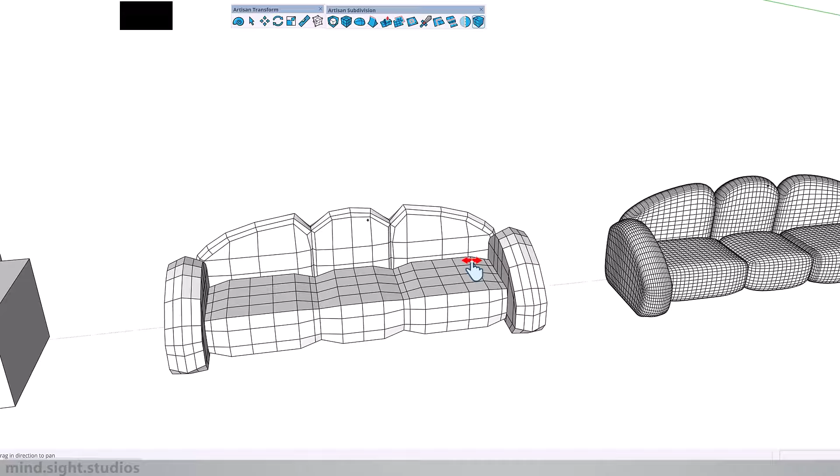So soft furniture is one of the hardest things to model in SketchUp. So in today's video, we're breaking down the Lithos Sofa using Artisan, and we're going from a low poly base to this smooth, realistic form in a step-by-step workflow with Artisan. Let's dive in.

So anytime you model something in SketchUp, you need to simplify the shapes first. For this example, we're going to model this sofa. And if you take a look at the reference images, you can tell that some of the shapes are similar while others are unique. So here's how we're going to break this down.

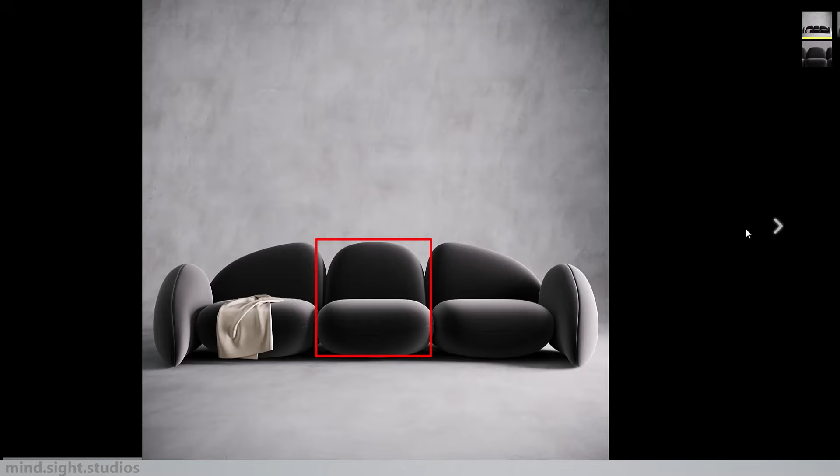First, we have this backrest and seating part, which is unique. Next, we have these two seating sections, which are pretty similar. And finally, we have the armrests. And because the sofa is symmetrical, all we have to do is model half and then mirror to the other side.

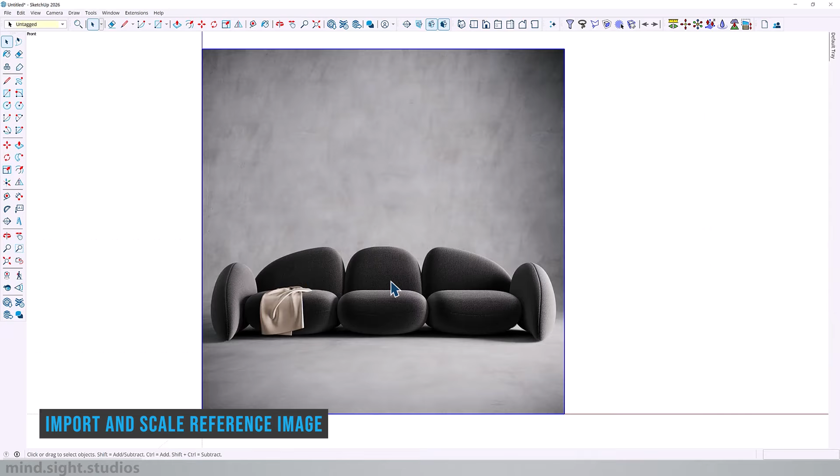So first, let's start by dragging our reference image into SketchUp. We're going to press X, that's a custom shortcut to explode. And then we're going to make a group.

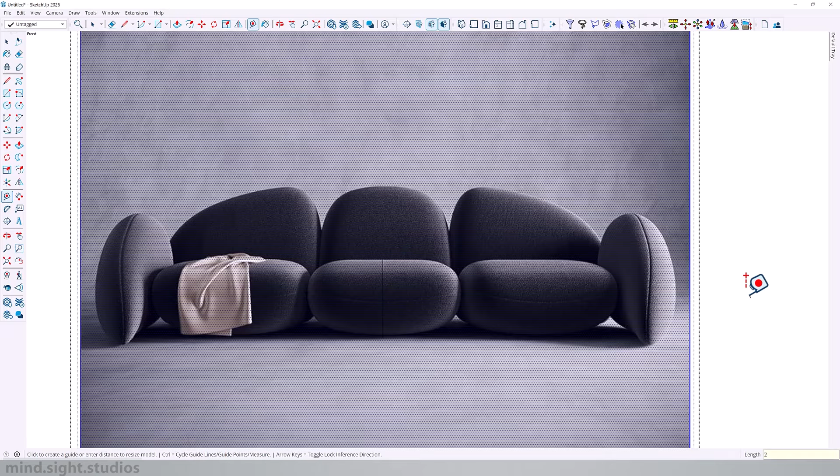All right, so first thing, we need to scale this image. I'm going to draw the 24-inch reference line for the height of the seating. And we're going to use the tape measure tool to scale it to that size. Type 2 feet, which is 24 inches, and accept the request to scale. And now we have a realistic proportion of our image.

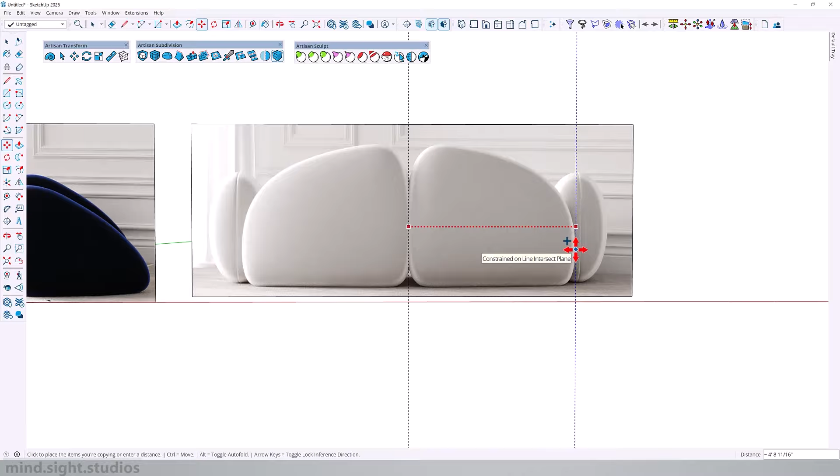This is also not a fixed scale, as we can always adjust things later in the video. And I found as many images as I could, scaled them to the same size, and now we can start to trace on top. Now before we start blocking the shapes, let's add some guidelines using the tape measure tool. So I'm going to use these guidelines just to get a rough measurement of some of these shapes.

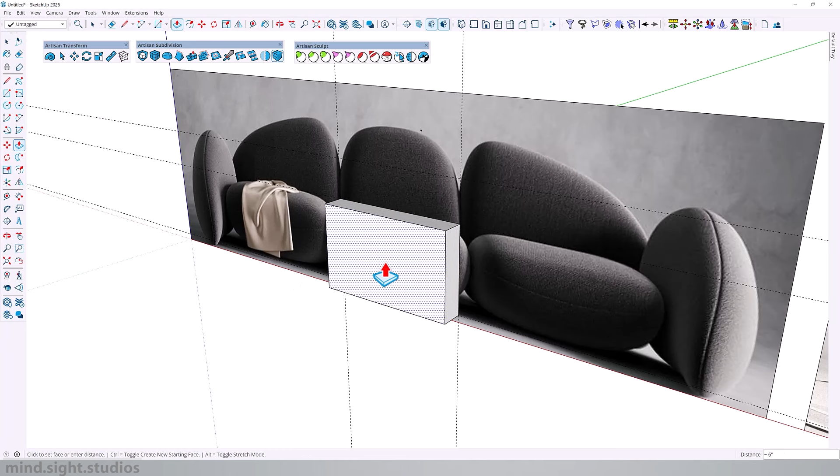Right, so first let's block out these shapes using the rectangle tool. And I'll do my best to come as close to the shapes as possible. And also use the push-pull tool to extrude into a rectangle. And as always, make sure to group your shapes into groups or components. So this is going to be a group.

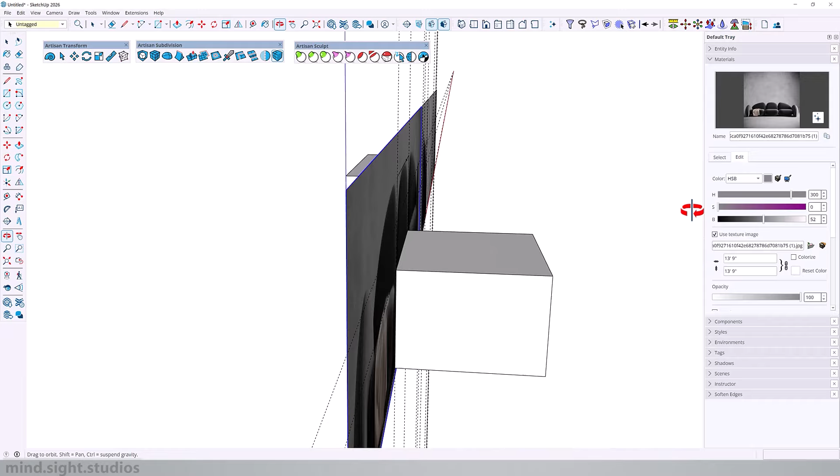And I'm going to repeat the same workflow to build out the backrest shape with the rectangle tool. Use the push-pull tool to extrude and convert it into a group. So we got two shapes, and in order to see through this material, I'm just going to select, go to my material editor and decrease the opacity.

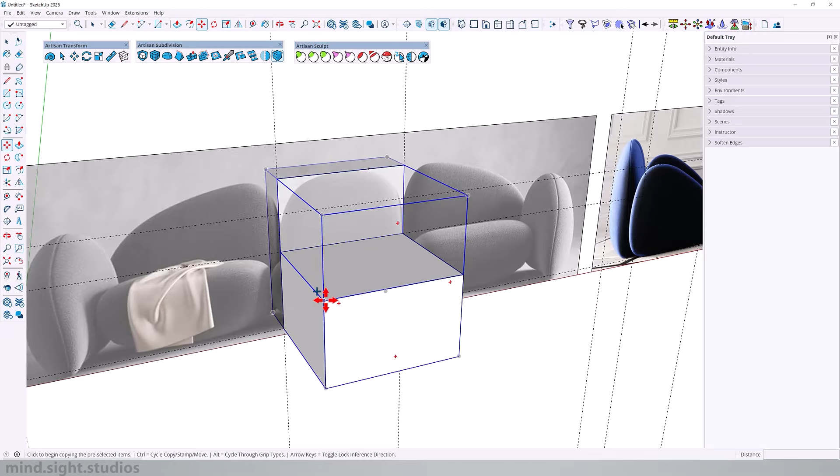So now that we have this mid portion, let's select the two shapes, right click and turn it into a component. And now that we have this, we can easily create the other two. So select move, hit Ctrl to make a copy, mirror to the other side. This is around a foot longer, so I'm going to right click, make unique.

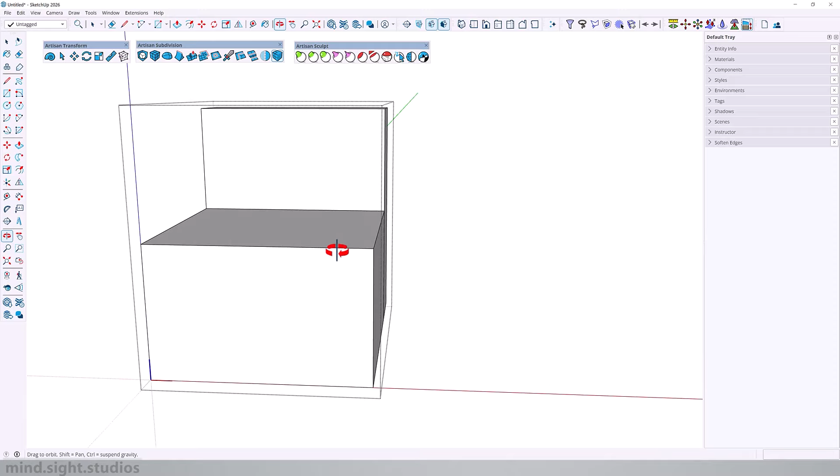And I'll go inside this group, and I'm actually going to use a SketchPlus feature called Deep Stretch. This allows you to stretch entities inside a nested group. Select these two outer edges and let's extend this another foot. So we have something like that.

And for the armrests, we're going to repeat the same steps. We'll create a rectangle. Next, push pull by 4 feet 6 inches. To me, this feels a little overscaled, but we're going to scale this down further at the end of the video.

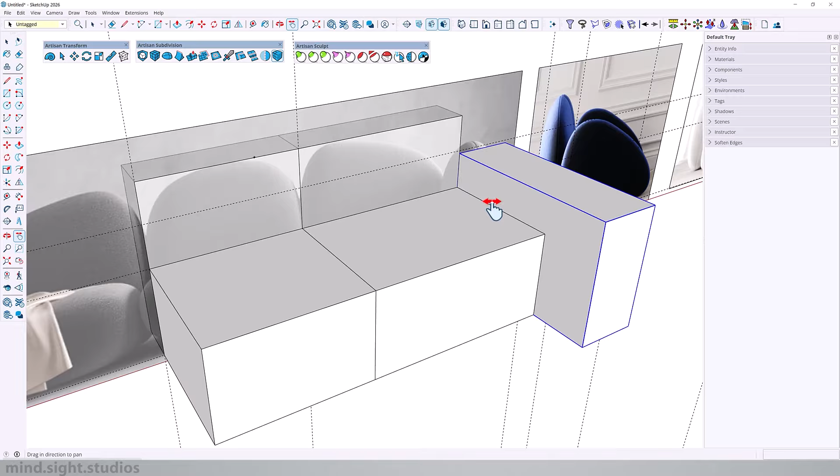So now that we have this half, I'm going to copy this in place in this component, and we're going to mirror this to the other side. So select that component, activate the mirror tool, hit Ctrl to make a copy, and drag the red axis to the center of your sofa so it creates another copy.

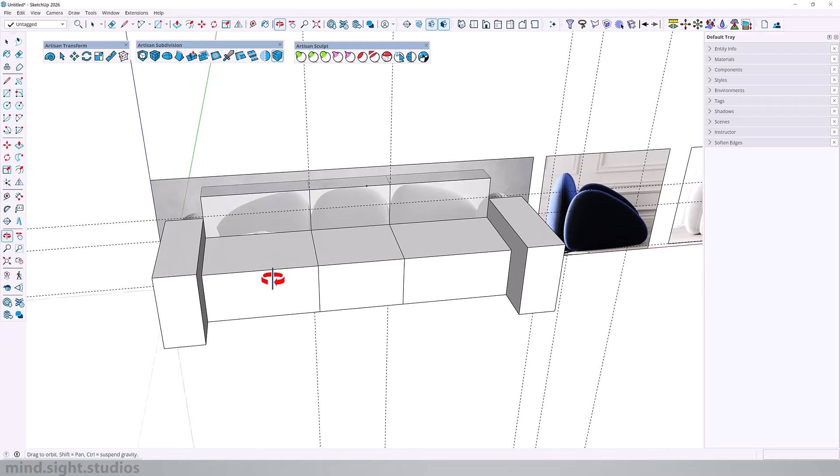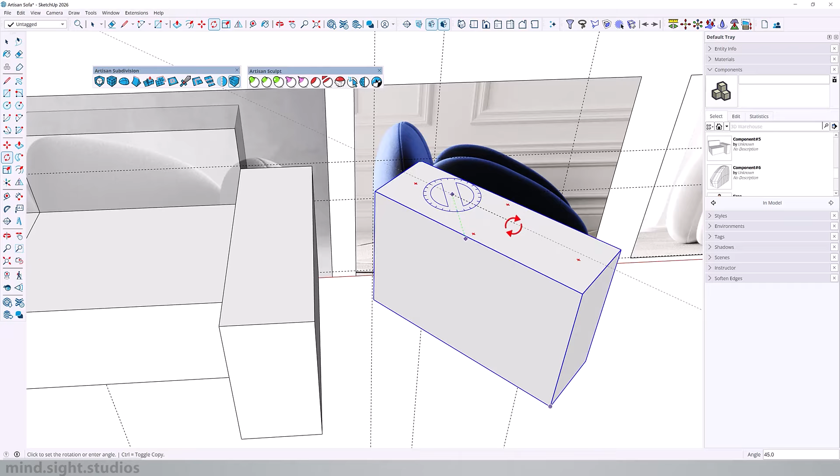And for our first step, we have our sofa completely blocked out. So for the next step, we're going to try and get these blocks as close to the shape in the reference images, and we're going to use a couple of tools in the Artisan extension. So we're actually going to come in here, simply going to copy this out of the group and line it up with the reference image. So turn it 45 degrees.

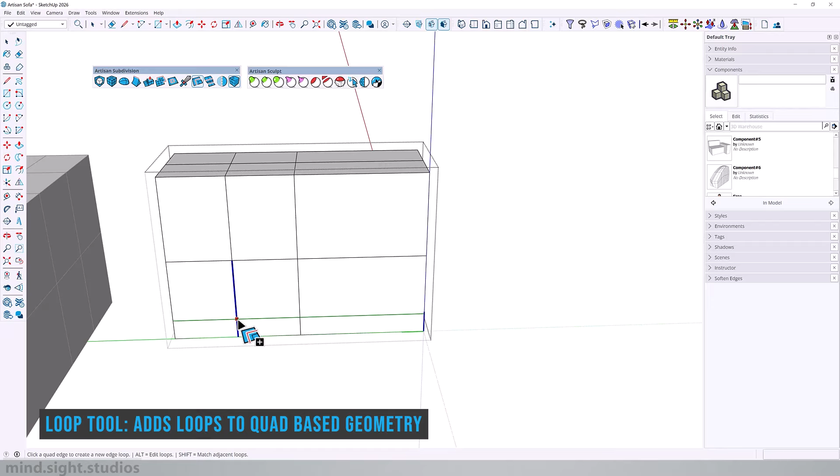Now from here, we'll go inside the component, as you can see, and we're going to subdivide once. And we get this quad subdivision across this block. So that adds subdivision automatically. And now I'm going to use the loop tool to add some manually myself. So I'm going to add one here, one at the bottom, and one to the right. And depending on the direction, this tool adds a loop cut across the entire object.

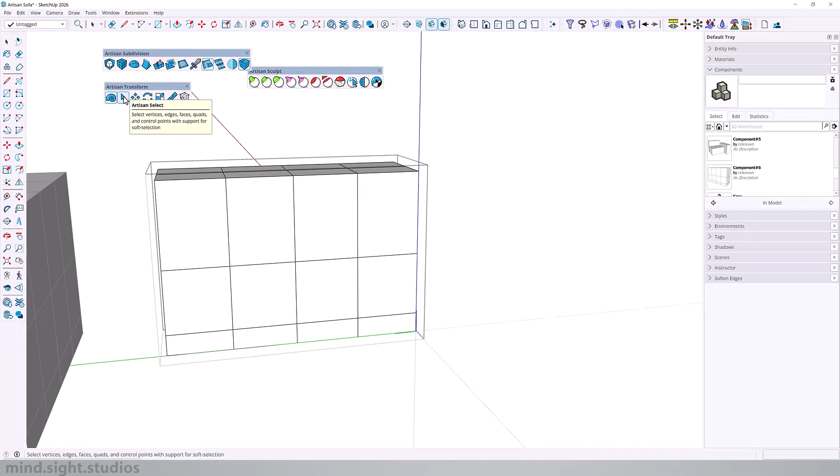And from here, I'm going to activate Artisan Mode. This is going to switch to Artisan's version of the SketchUp tools, which will be these guys right here. I can now use the select tool to select some of these vertices and edges. So now we can start to move this and try to come as close as we can to the actual shape of our image.

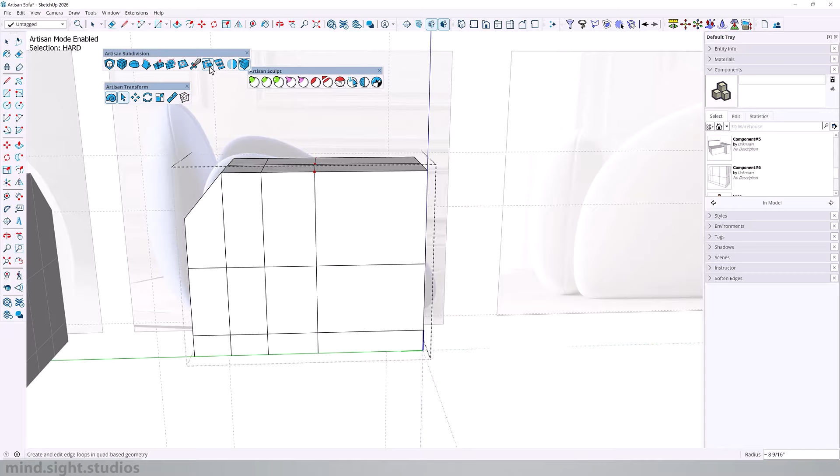So my workflow here is pretty simple. I'm selecting the vertices and edges and repositioning them to match the profile of the reference image. And while doing this, I'm adding as many loop cuts as possible to subdivide my shape even further to make it easy to create the rough shape.

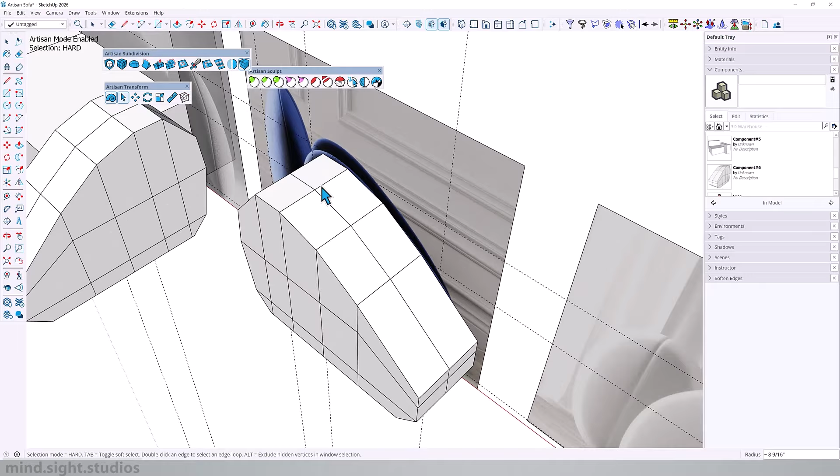Let's suppose we end up with something like this, which is not perfect by the way. But to show you what this could lead to, I'm going to activate Subdivide and Smooth and increase the iteration to 2. And as you can see, this gives us that smooth shape that we can see in our reference image. So it seems like everything is going in the right direction. So let's add a little bit more detail to the subdivision.

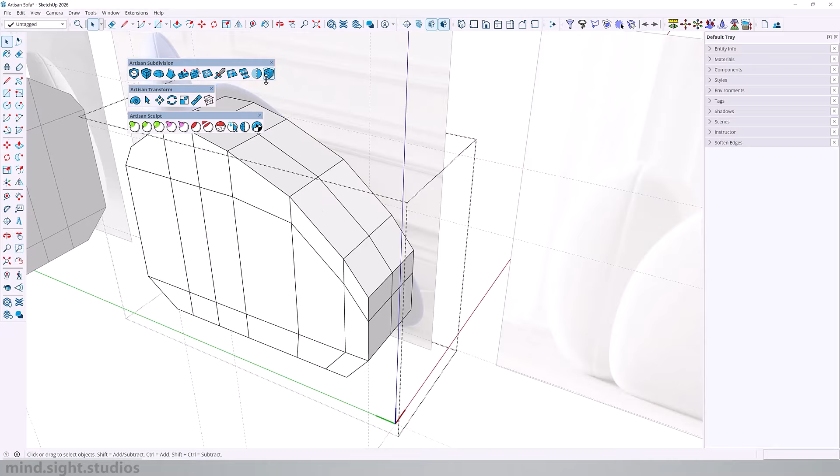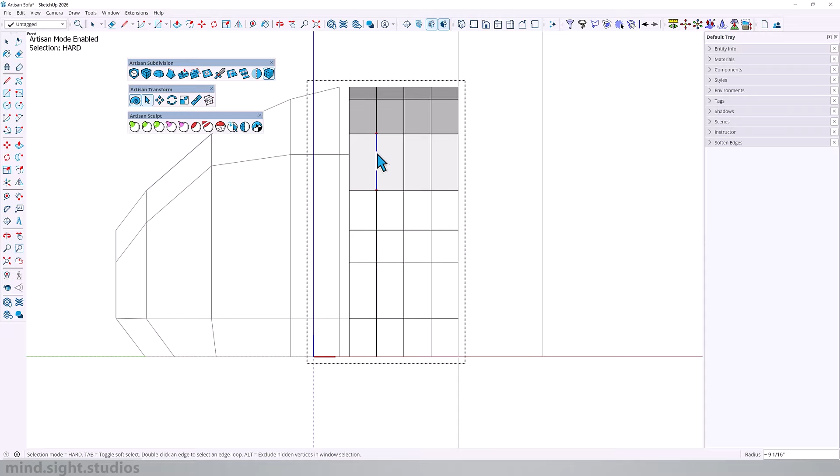Let's go inside the group and we'll activate the loop tool. We're going to add 2 more extra loops, one on either side. Align view and parallel projection. Next, we're going to activate Artisan Select, and I'm going to double click to select my loops. So one click selects one edge and double click selects an entire edge loop. And I'm going to hold Shift, do the same to the next 2 loops.

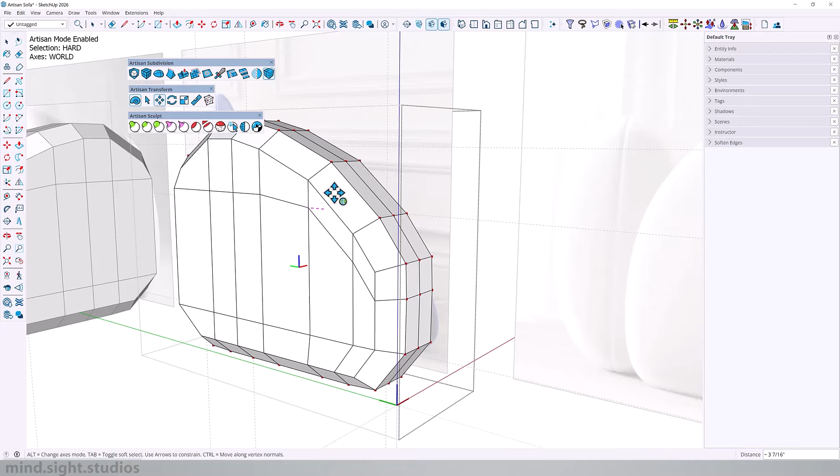Remember, we are in Artisan mode. I'm going to select the Move tool with my shortcut, click once to make my move, and right here I'm going to hold Control, and this is going to allow us to move the selection along the vertex normals. And we'll repeat the same for the loop cut in the middle. So double click to select, activate Move, click and hold Control to move along the vertex normal.

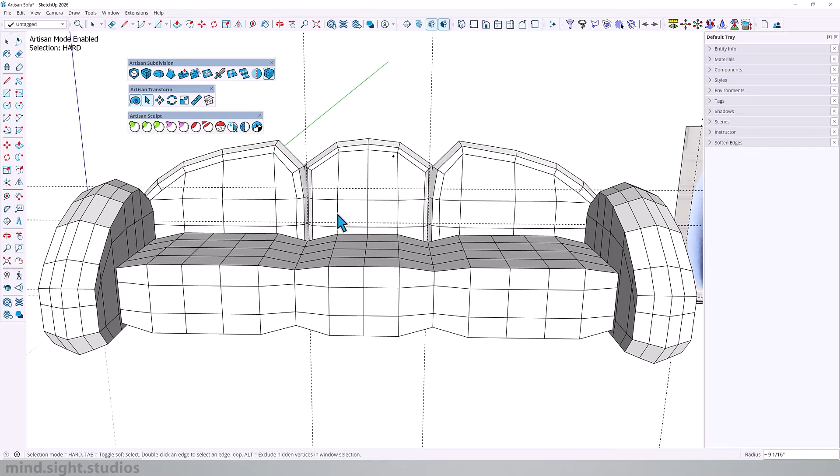Now before we continue, let's apply the same workflow to these rough shapes. We can go from this to this, and if we hide the reference image, you can see how it's more or less pretty close to the shape. But here's where we can start to add some detail. If we look at the very bottom, you can see that some of this needs to be completely flush so it feels like it's resting on the floor. That's the case with the armrest and some of the backrest as well.

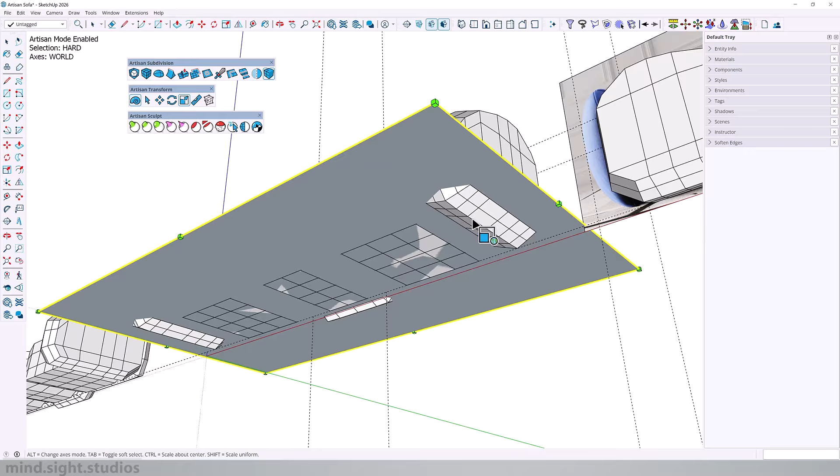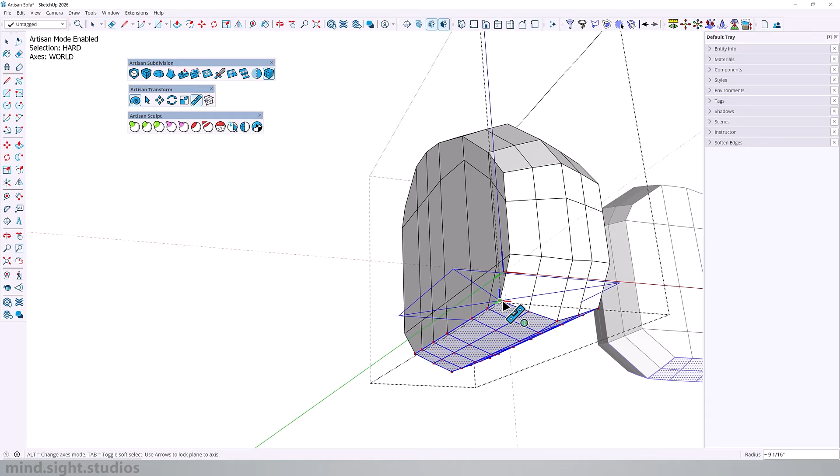So what I'm going to do is draw a plane, and we'll try to flush everything that's past this plane to that level. So in order to do this, we're going to use Make Planar. If I come here, I can make my selection of the vertices and edges that I wish to make flat. Activate Make Planar, reference one of the vertices and use the up and down keys to switch the axis. So this is going to be on the blue axis. Make one click and that flushes everything to that plane.

And if you start to see mistakes like this, I can select that vertex alone and just move it up. So that solves one. And then we got back here as well.

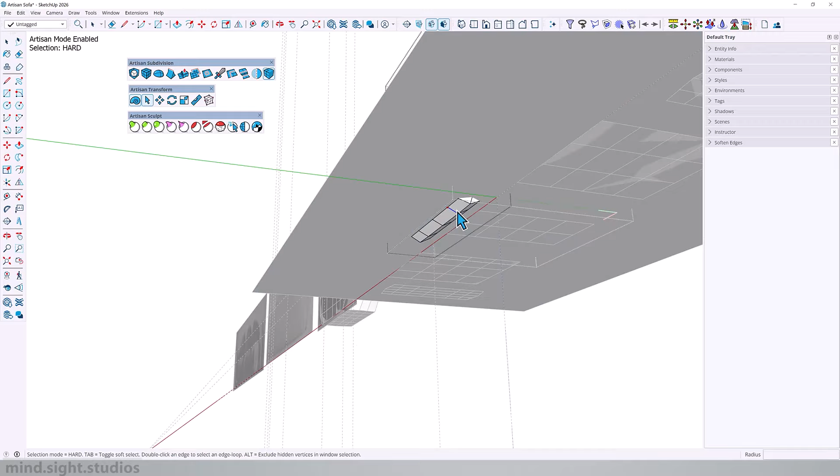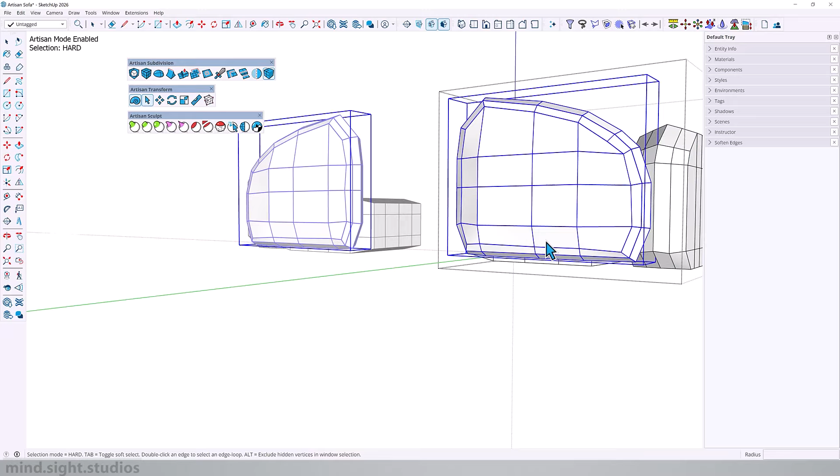So let's repeat. Make selection, activate Make Planar, reference the vertex, lock on the blue axis using the arrow keys, and click to flatten it out, and you should have something like this. Now what I don't see is actually these guys touching the floor, so we'll go into that group, make that selection, and we'll bring it up to that point.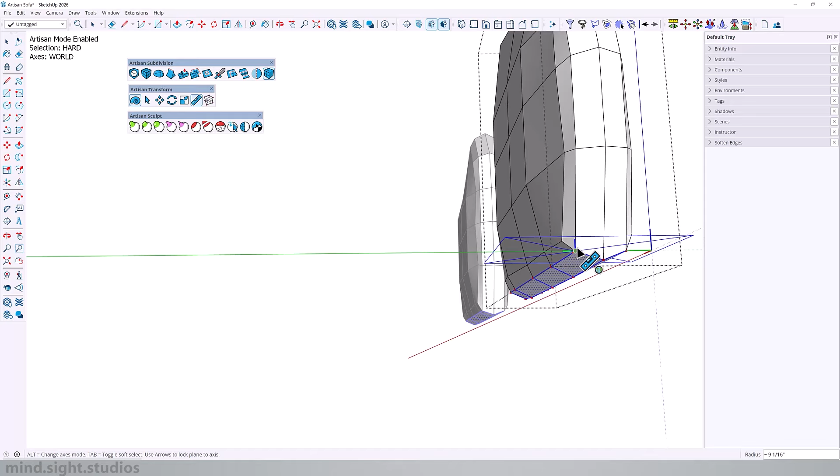So reference that point, bring it down on the blue axis and lock it down to the face, and then we'll repeat the same step. Select, Make Planar, vertex point, and click. So now that looks much better. As you can see, everything is touching the floor. Now this is actually a very important step, and we're going to repeat this on certain areas of the backrest so everything feels flushed.

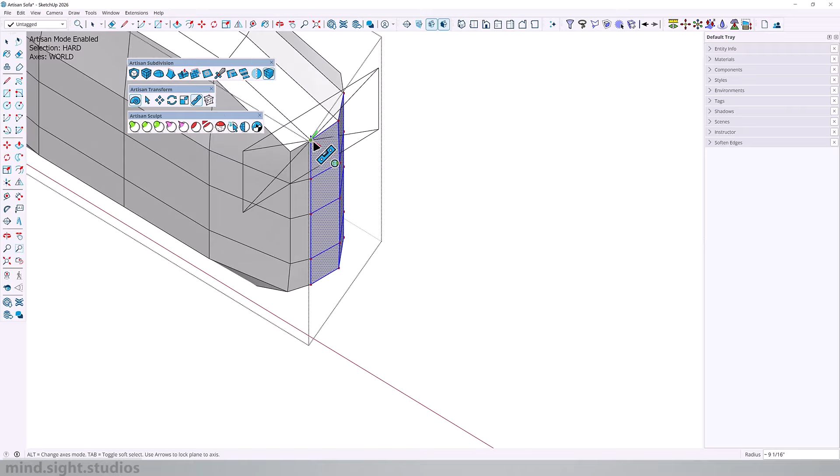So we're going to use Make Planar to make these side edges flat. And just to add a little bit more detail, we're going to move these edges a little bit further so it has a bit more of a round profile. And also, just to be safe, we'll add another loop cut on the left and right sides of the cushions, and you should end up with something like this.

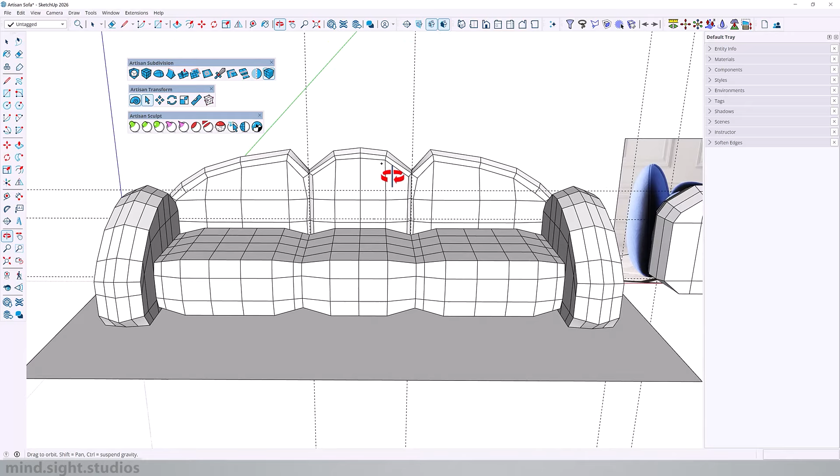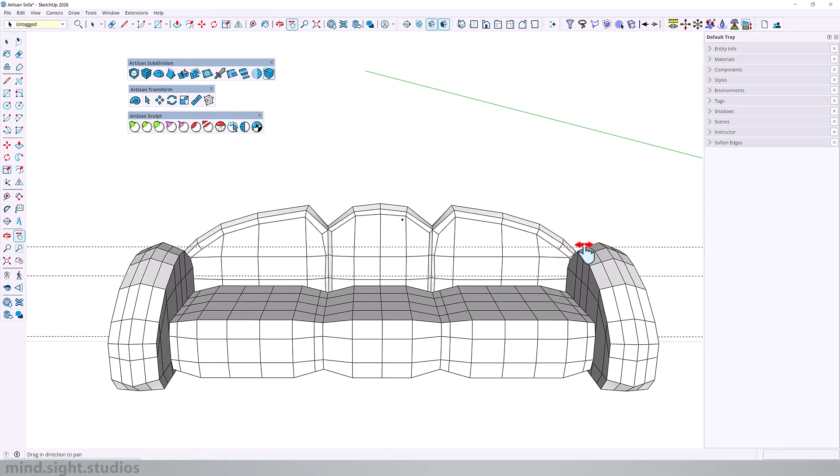Okay, so let me repeat the steps very quick. So far, we had our reference image. We blocked out the basic shapes. We use subdivision and artisan tools to move everything as close to the rough shape of our reference image. And when you apply Subdivide and Smooth, which is this tool right here, you will get it close to this.

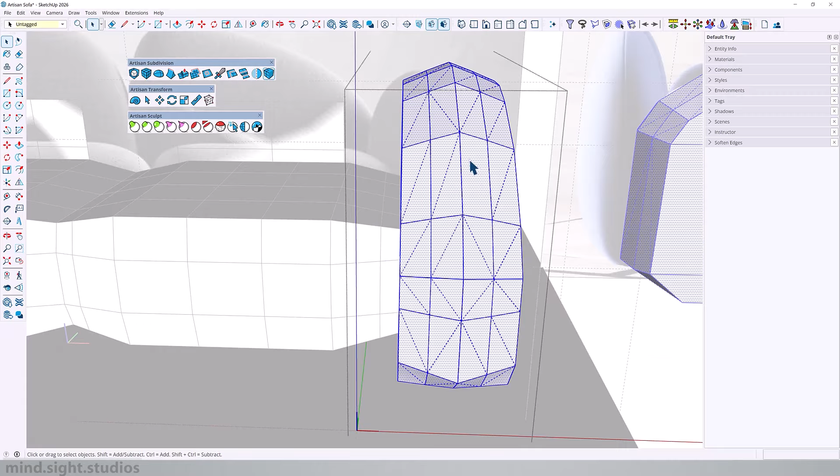Now, this is pretty much close to our final result, but it's missing one key detail, and that is the crease you see around different parts of the sofa. Now, to add the crease, it's actually very simple. All we have to do is add a couple of extra loop cuts very close. So we're going to this component, for example, activate loop tool, and we're going to come very close and add one to the right and another to the left.

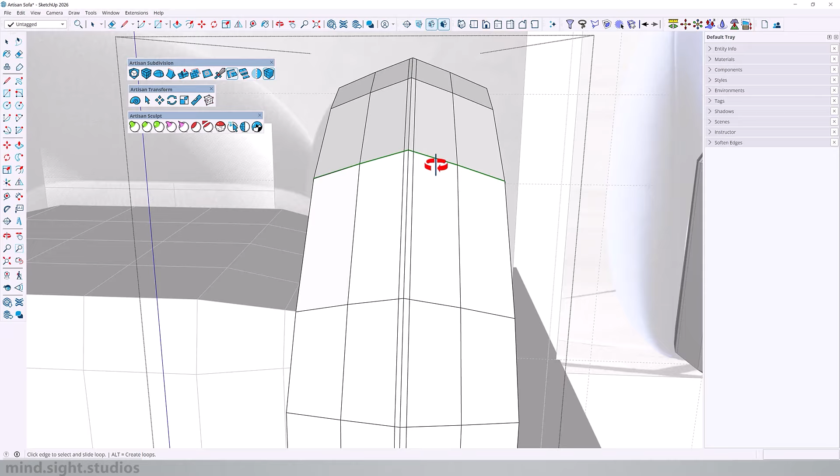So with the tool still activated, you want to press Alt so we can do some editing. And then I can select a loop and I can move it around in case I want to reposition this loop in any other direction or distance, but we're going to leave it as is. And now the next step is to move this loop selection inwards. So let's activate Artisan mode with the selection tool. Double click to select my loop.

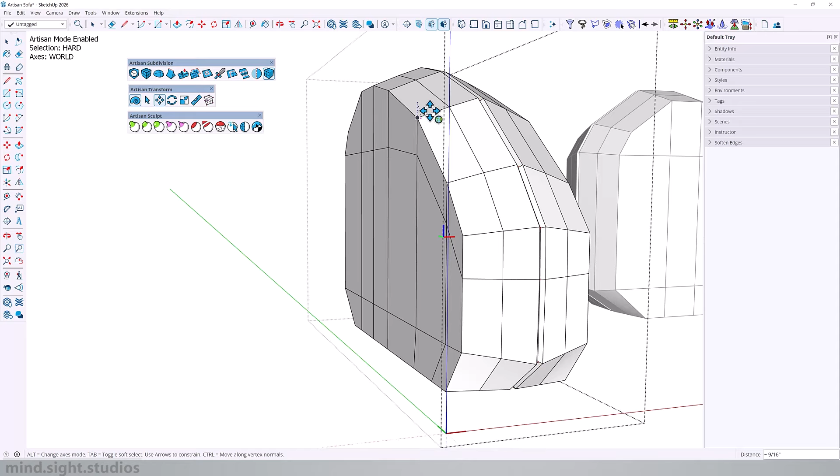Next, activate the move tool. I'm using M as my custom shortcut. And while in the move command, you want to press Ctrl to move along the vertex normals. This will go inside to create our crease, let's say at about half an inch. So you want to create something like this.

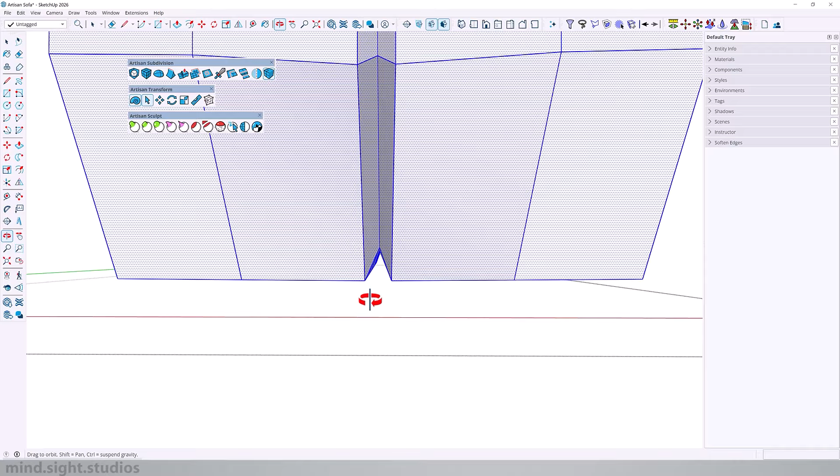Notice how the crease is created through that entire loop, but if you want to level this out, you can use the Make Planar tool and flush it to this vertex. So you will have something like this. And that's how this looks. So let's repeat the same workflow into the other shapes.

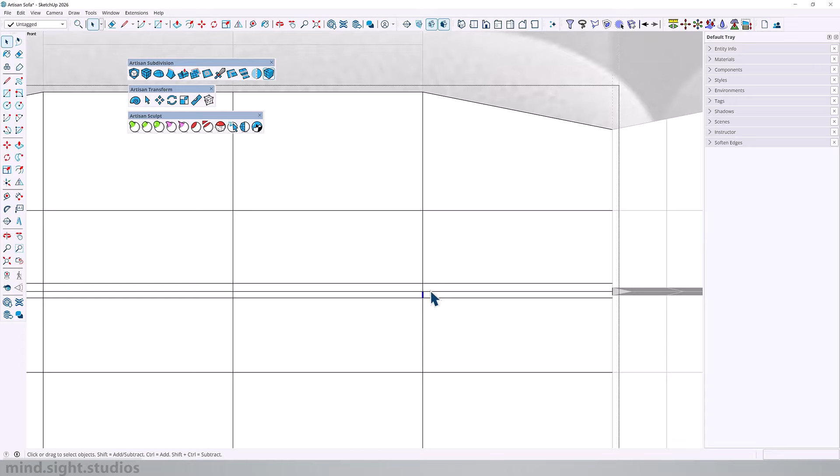And to keep it simple, you want to use the loop tool to add 3 loop cuts close to each other. And also make sure you're working in artisan mode to select your loop and use the move tool to move it inwards along the surface normals. So now that I'm done, it should look something like this. I'm going to repeat the same workflow to the backrest components. And we should end up with something like this.

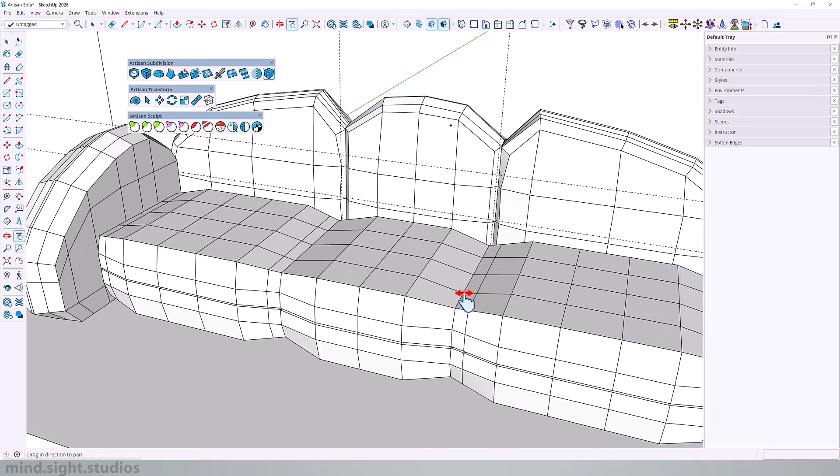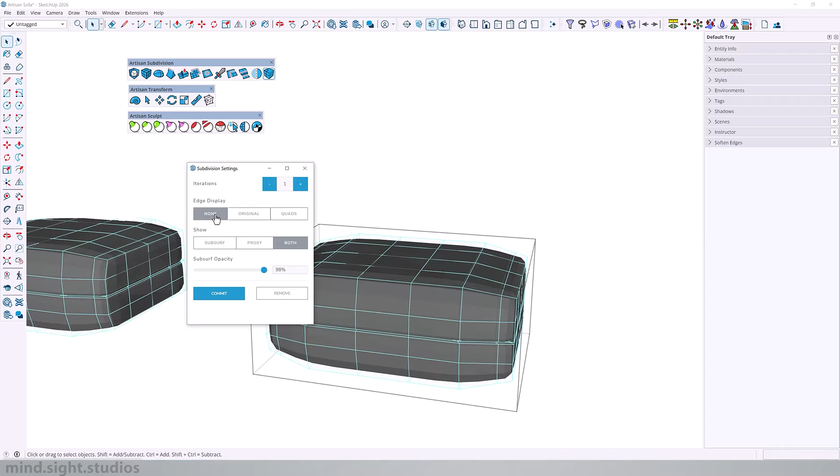So now that we've added the crease, we only have a couple of steps left. And from here, we can start to smooth the geometry. And we can do this in a couple of ways. For example, I can go into this group here, activate Subdivide and Smooth. You can increase the iteration, which is the level of detail. You can also display the original edge, no edge at all, or the quads. And for the visibility, you can choose between the subsurface or the original proxy.

So from here, for example, I can select the subsurface, increase the iteration, and you pretty much get our final result. And if you wish to make any changes, you can just go back, or if you want to stick to these results, you can commit.

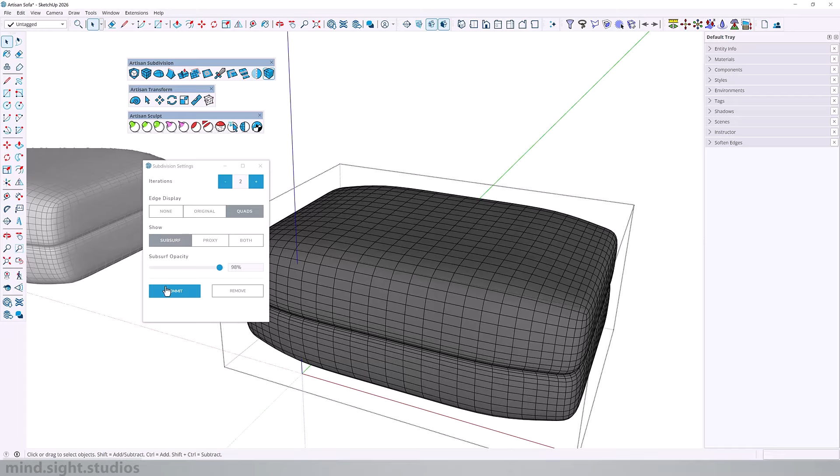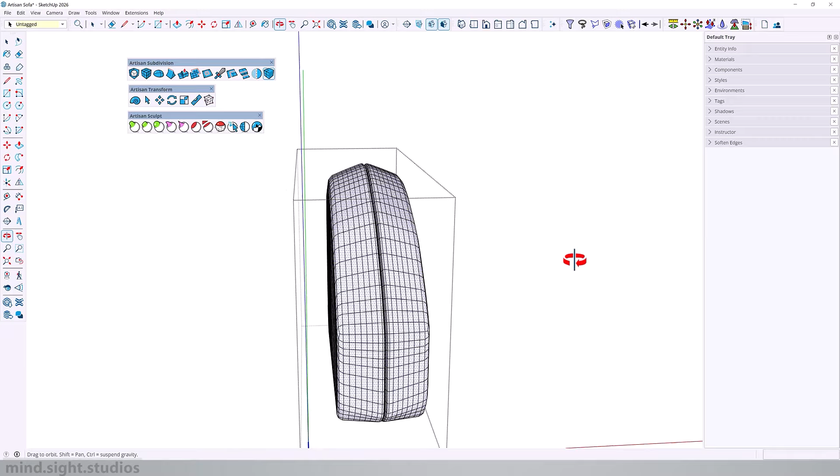The next way you can also do this is to go back to your shape, select all, and we can actually increase the subdivision from here. So it adds another level of detail. And from here, once again, select everything and activate Subdivide and Smooth. And you will get something like this.

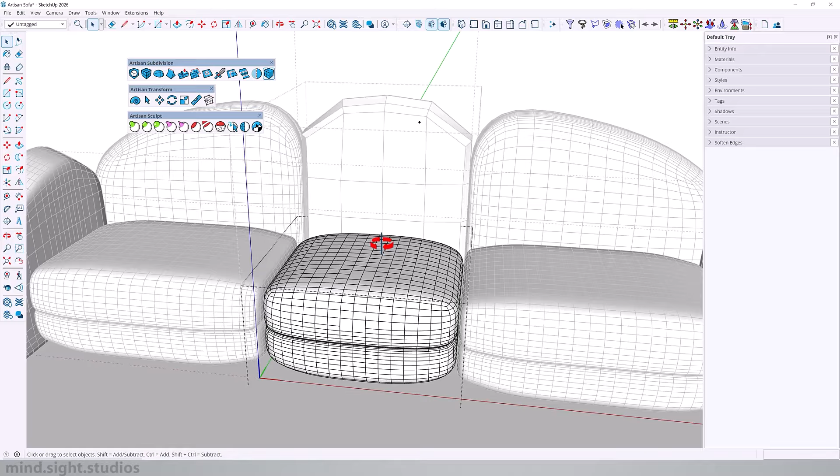And for the last way, you can select your entire shape, activate Subdivide and Smooth once. And if you want to increase the iteration, just click again to add another level of detail, and you should end up with something like this. And that's pretty much half of our sofa almost finished. So let's repeat to these last few components, and we should end up with something like this, and very close to our final result.

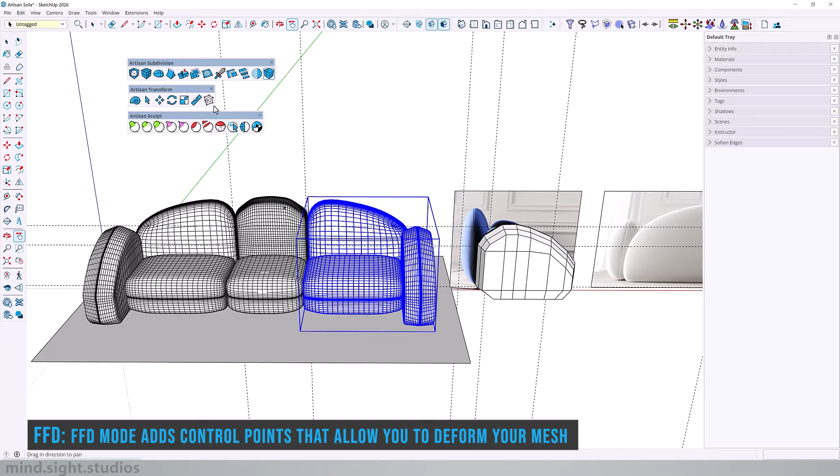Now, the very last step is that if you look at a reference image, it looks like part of the armrest bends a little bit in. And you can do this by using the FFD tool. So for example, you go into your shape, activate FFD. It adds these little control points that you can use to bend your geometry. And you can actually change how many points to add. For example, we have 3 sets of 3. I'm going to change this to 3, 4, 3. And you can see that change.

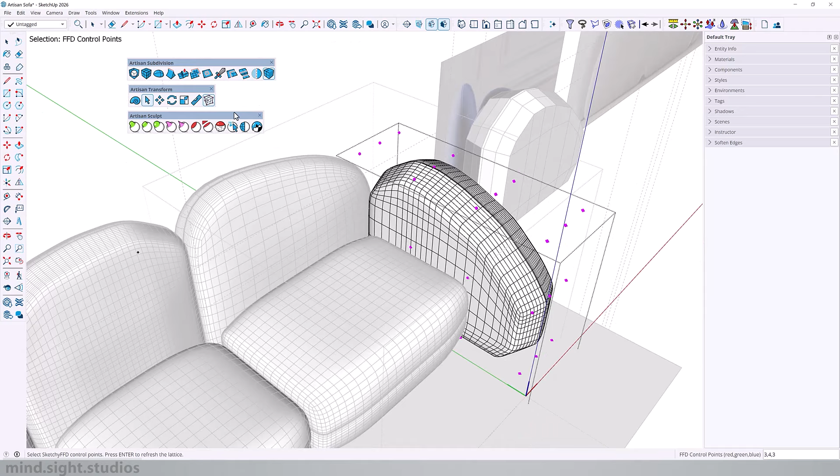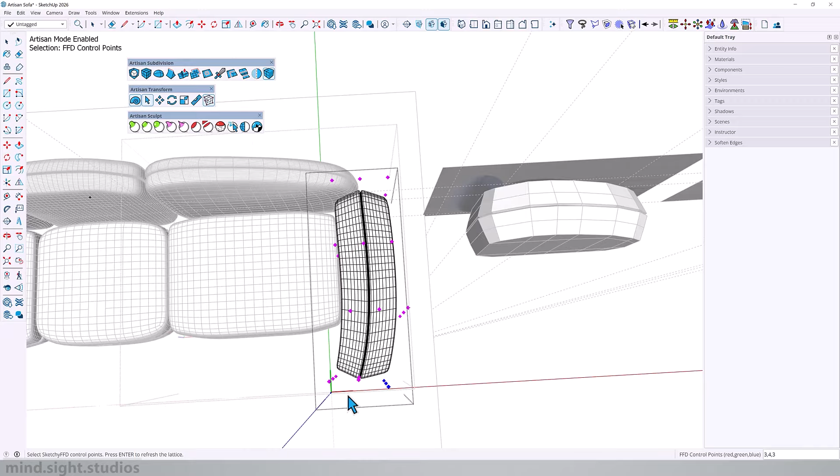Activate Artisan mode, and now we can start to control these points to bend our shape. And here I'm using the move tool to move these control points, and you can see how it starts to affect our 3D object. And as a result, we get this fluid bend in the overall shape. And because this is a component, same will happen to the other side. And if you look closer, you will notice the same bend on the seating area.

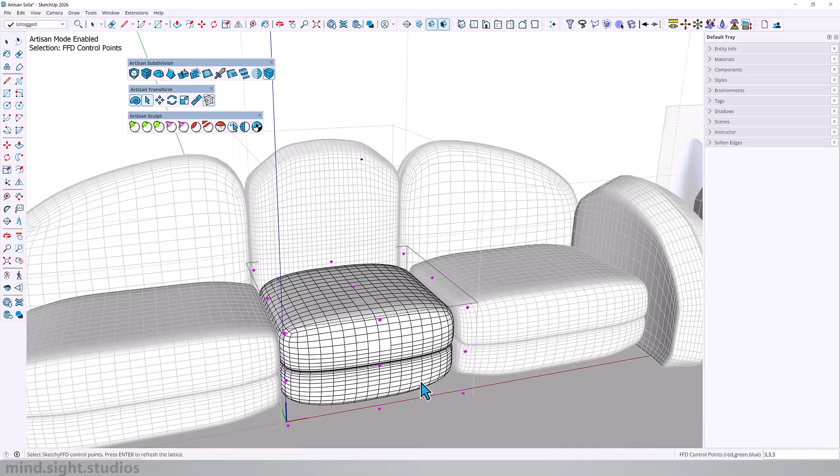So let's repeat that same workflow in our model. So let's go into the group, select all, and activate Artisan mode. And when we activate FFD, we will get our control points and activate the move tool to move these around. If you look closely, I've selected the points at opposite ends and slightly moved them up.

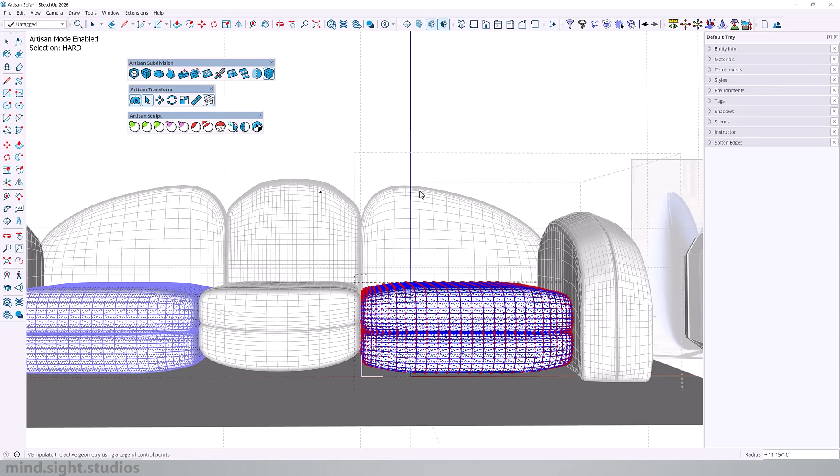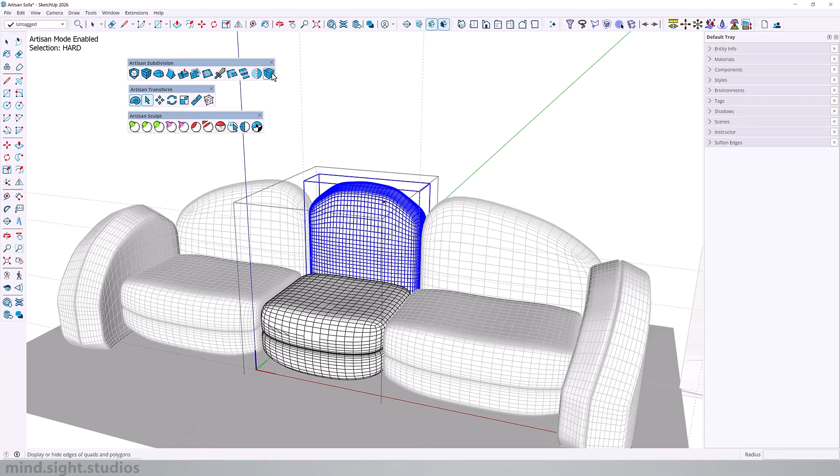And we'll do the same here. Go inside, activate Artisan FFD, select the outer points, select the move, and we'll move these up 2 inches. And with that, we are almost there. Let's do a little bit of cleanup and hide the edges from our 3D objects. So let's go into the group and toggle hide edges. And we'll repeat the same in the other shapes.

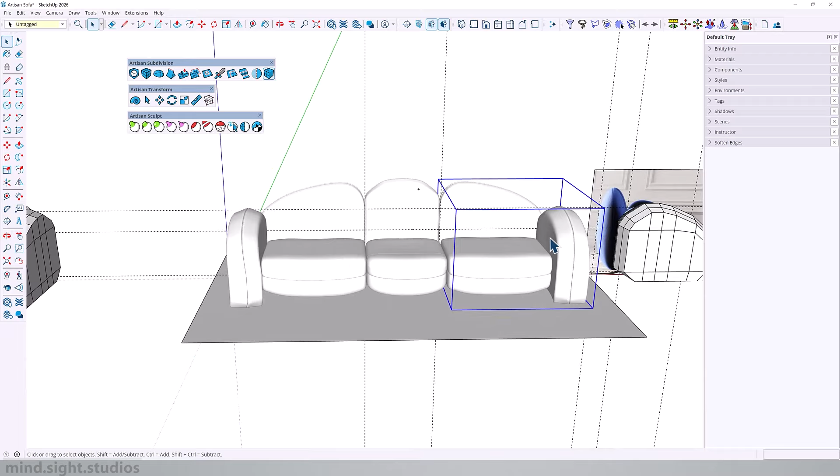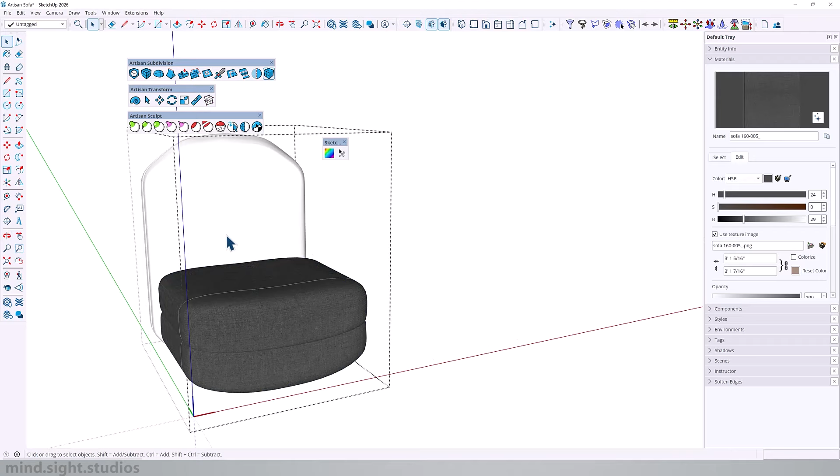Now we're actually quite far into the video, but it's pretty cool to see everything come into fruition as we're very close to our final result. So the very last step is to add textures. So to apply the material, I used a very simple workflow, brought in my texture that I applied directly to the face of the 3D object, and then I used SketchUV to apply a more advanced mapping technique. So you simply right click and select the box mapping and scale if you need to. And I've repeated this workflow across all the other 3D objects to bring it to our final result. And this is what we end up with.

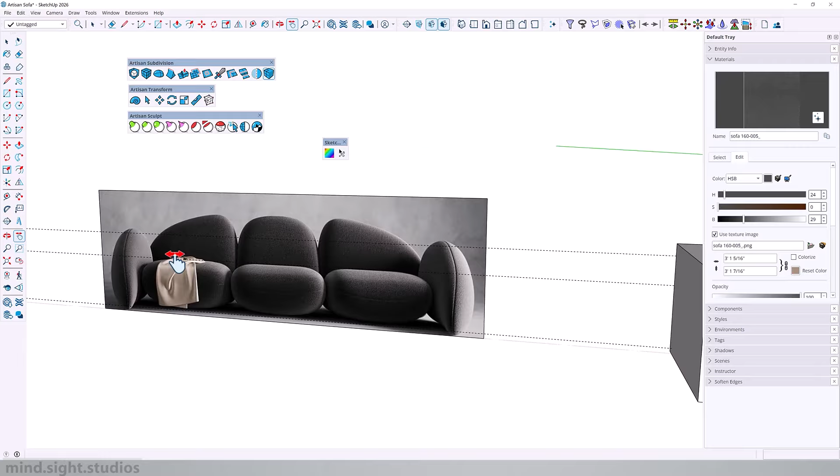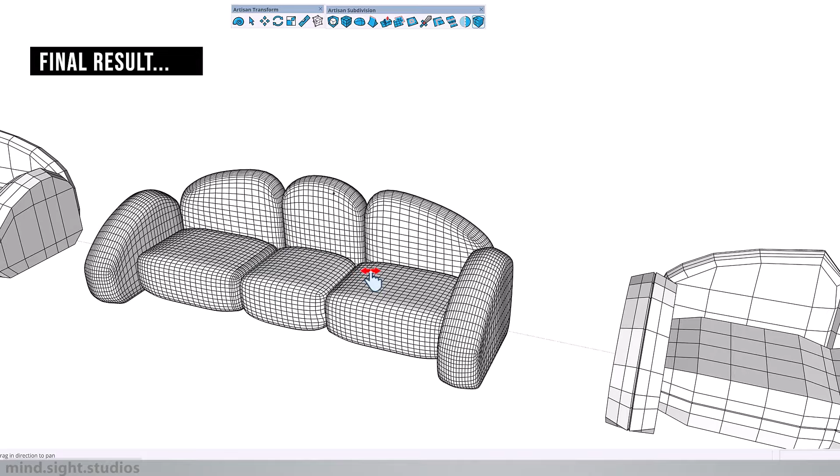This was really a practical video that went across some of Artisan's essential tools. And really, once you go through this entire workflow once, everything becomes much easier and quicker for you to learn. Now, obviously, this isn't a perfect one-to-one, which is why I saved all the essential steps so I can always go back and make some changes. And if I really wanted to shrink this down at the bottom so it looks a little bit more like the reference image, I could easily do that. So this is another tip I advise you guys to follow as well. And that's going to be all for this video. Hopefully this entire workflow is showing you how you can model soft and organic furniture inside of SketchUp.